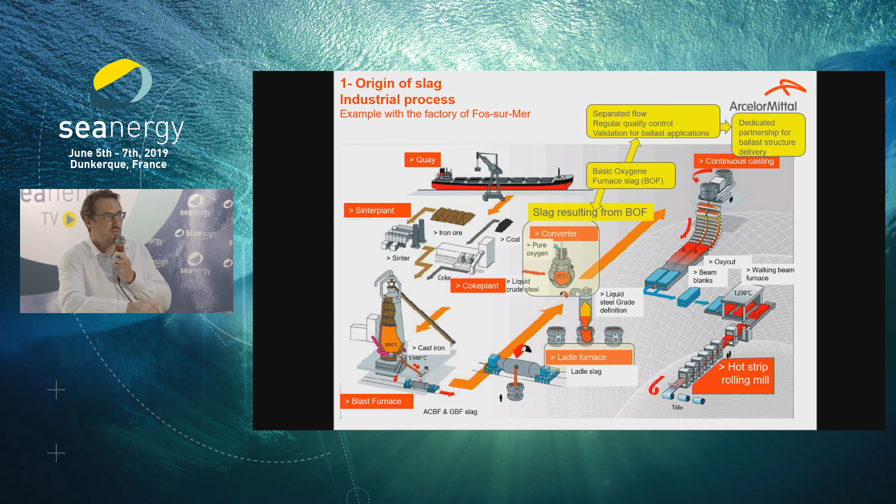In a steel plant, in the process of steelmaking, we have different steps with different generation of byproducts. In these different steps, we generate an average of 50 different byproducts in the steel process. We select one of these byproducts generated by the converter, which converts the pig iron into steel. At the step of the converter, we inject oxygen into the liquid pig iron in order to extract the carbon and generate CO2.

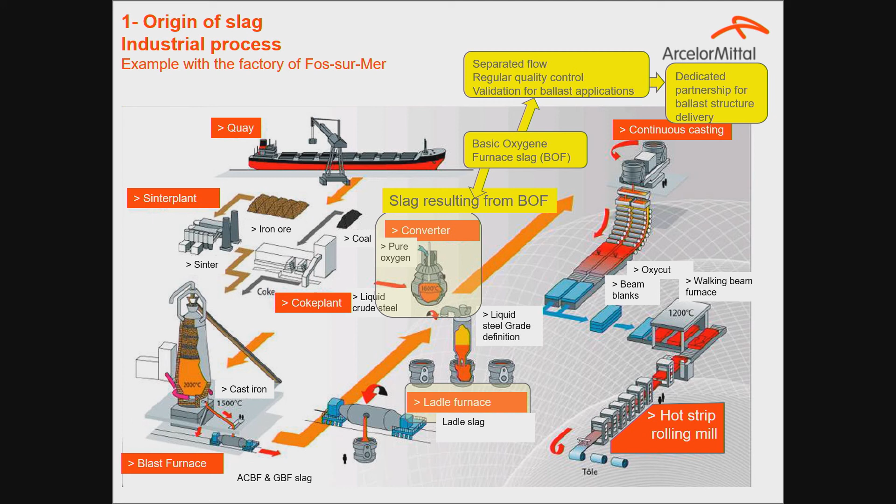During this step, we also inject a large quantity of lime into the liquid steel. Part of this lime is transferred directly into the slag, the converter slag, and part of the steel is also a component of this slag. This slag is extracted from the main flow, and quality is checked from this converter up to the final product definition, so we work as a quarry.

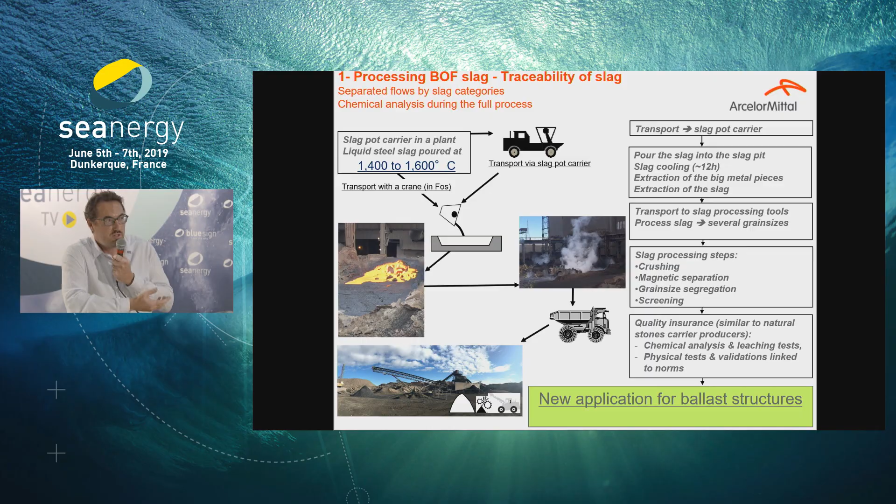So you have there the different steps of the process inside a steel plant. Typically, this is the case of the plant of Fos-sur-Mer, but you have the same process which you will find in the plant of Dunkirk. In these different steps, we slowly cool the slag and prepare the different grain sizes of the final material. What we can say is that this material has an interesting high density, but ArcelorMittal has never checked the possibility to propose this possible ballasting material to the offshore windmill park.

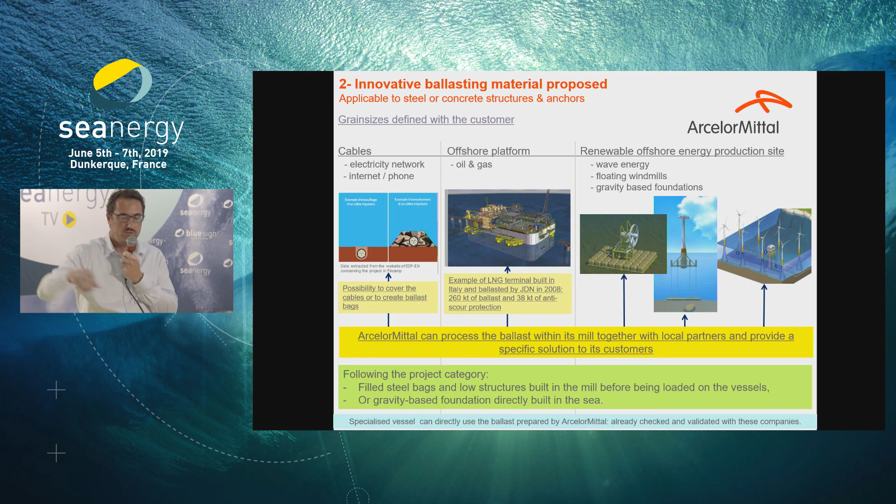So the idea is to propose this recycled material in different applications, such as stabilization of cables, offshore platform ballasting, and also floating structures and other structures built in the sea. Inside ArcelorMittal, we are also ready to prepare designs made of steel in order to generate different boxes and bags which can be put on cables or on different structures, depending on the need of the customer.

So what is interesting in this application? We generate value based on this byproduct generated in our steel plant. This is fully innovative, today it has never been done around the world. This is also a solution which will be tested in front of Marseille, directly in the sea, in order to estimate the impact on reefs and generation of life in the sea.

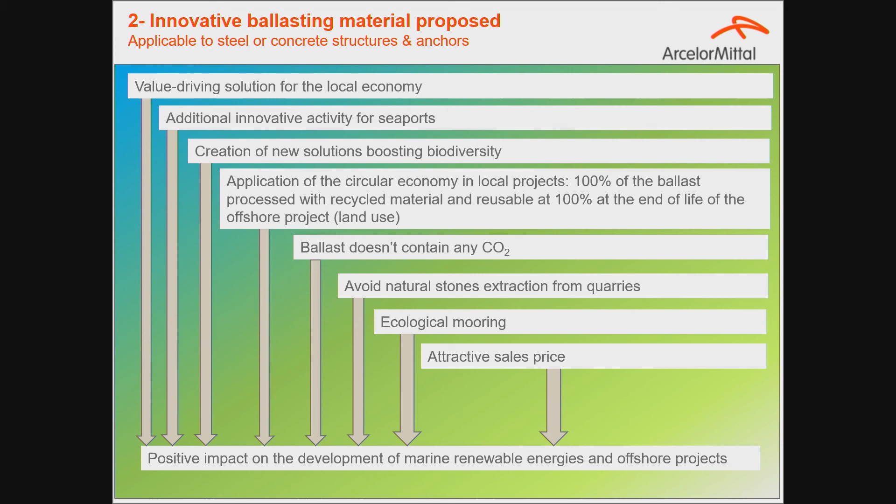So we think that this material will boost the ecosystem in the sea directly, due to the fact that today it is applied for plants on Earth. We grind this material and use it in agriculture today as a liming agent for the soil. The effect is very beneficial for the soil today, and we think the effect will be the same on plants in the sea.

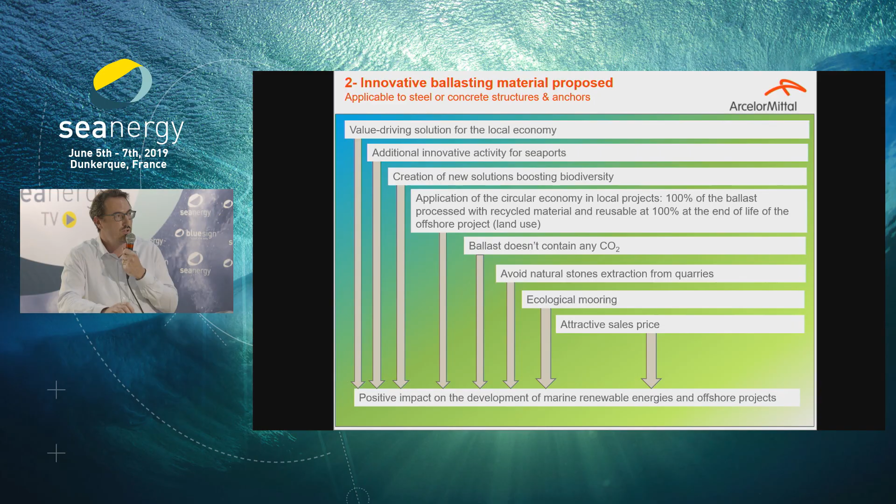The ballast doesn't contain any CO2 today because the CO2 is charged on the steel. We apply directly a clear circular economy project. It's a local project with local material for ballast. We avoid extraction of natural stone from quarries, and we propose different solutions such as new ecological mooring also for application in the sea. In parallel, we will apply a clear attractive price for this material.

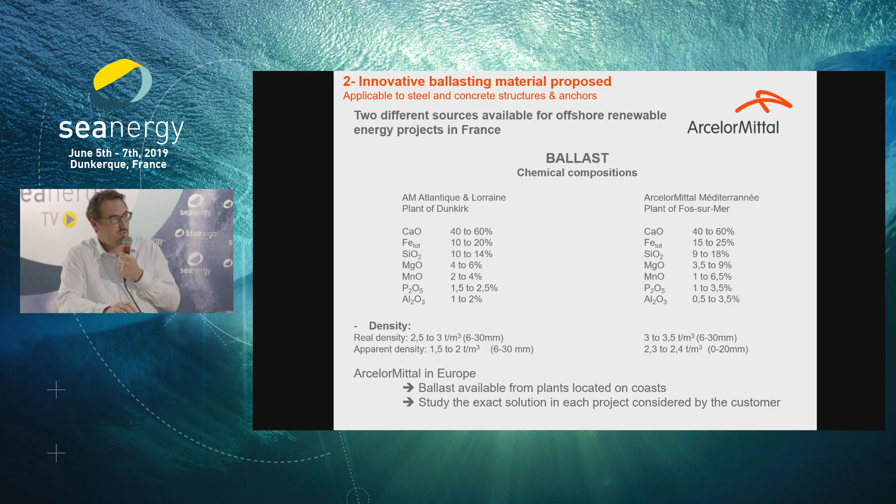So you have there an idea about the composition of the material. The content of iron inside the material will provide high, interesting density for this application. And you have there some typical values for the density. So we can estimate around 3.5 tons per cubic meter of real density.

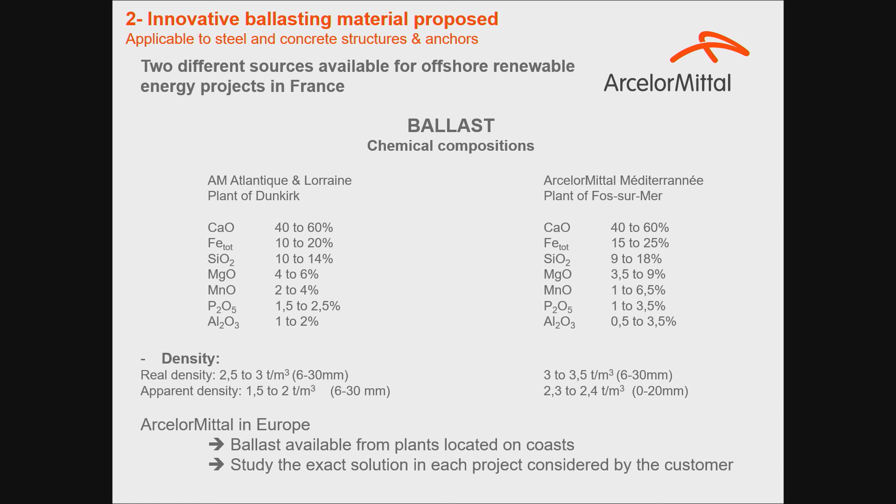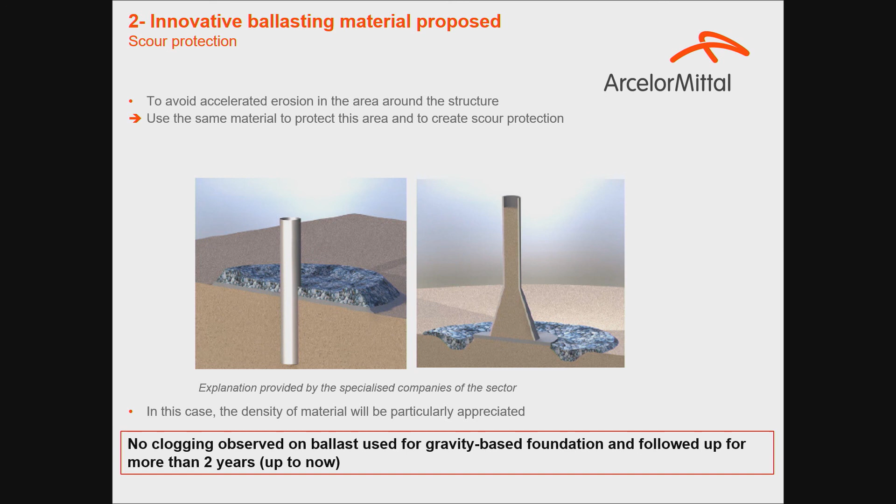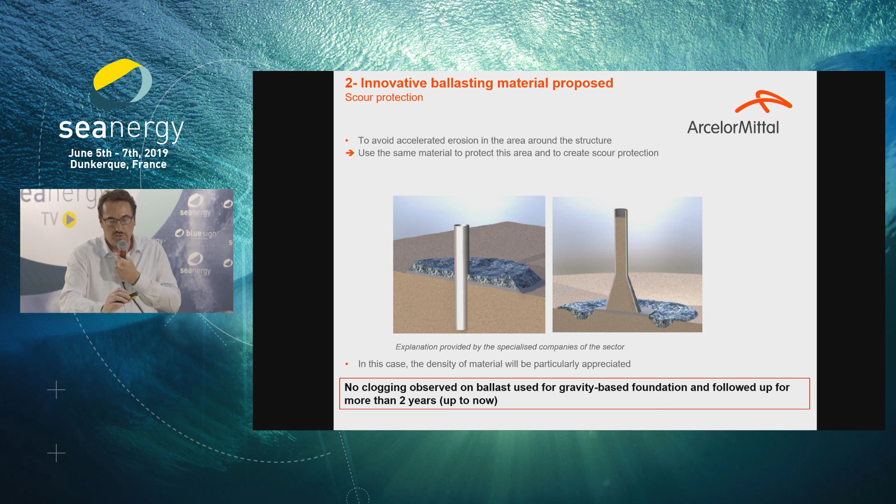We can also propose this ballasting as a scour protection around the different windmills. Due to the high density, it's more stable, and in this case we can boost the local environment, generating some life that will be favorable for the plants.

In parallel, this material is charged with lime. Part of the lime is free lime, so we get an effect of expansion, and we conducted technical tests in order to get clear validation of the use of this ballast in a closed structure.

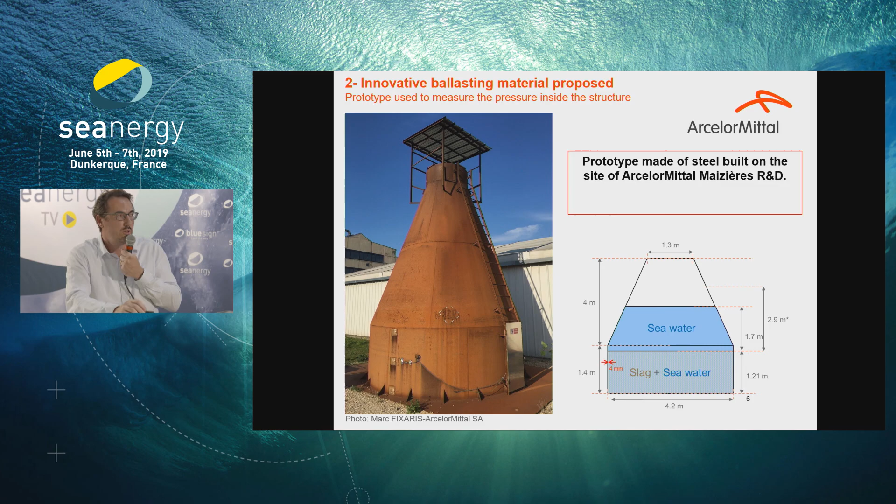In this case, we built at a 1:5 scale a structure prototype in our research center in Maizières, and we followed up inside this prototype, which has been ballasted and filled with seawater. We monitored the pressure exerted inside the structure in order to validate that the expansion would not cause disruption from too much pressure on the wall.

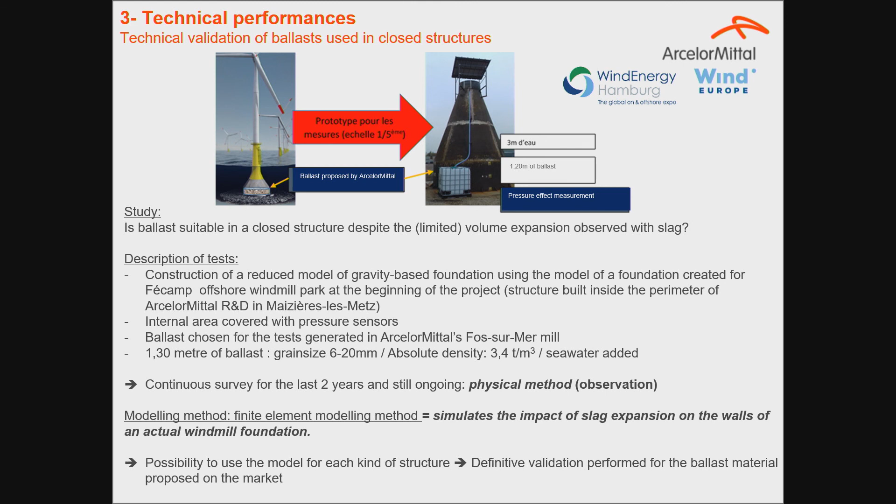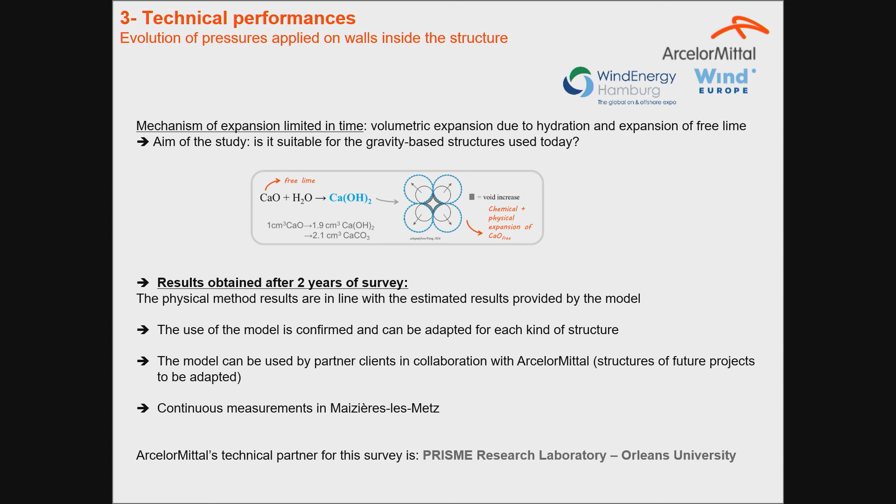So this has been validated. You have there the effect of the free lime in contact with water. The expansion is clearly limited, as we have measured since 2 years ago, with regular measurement of the pressure on the walls.

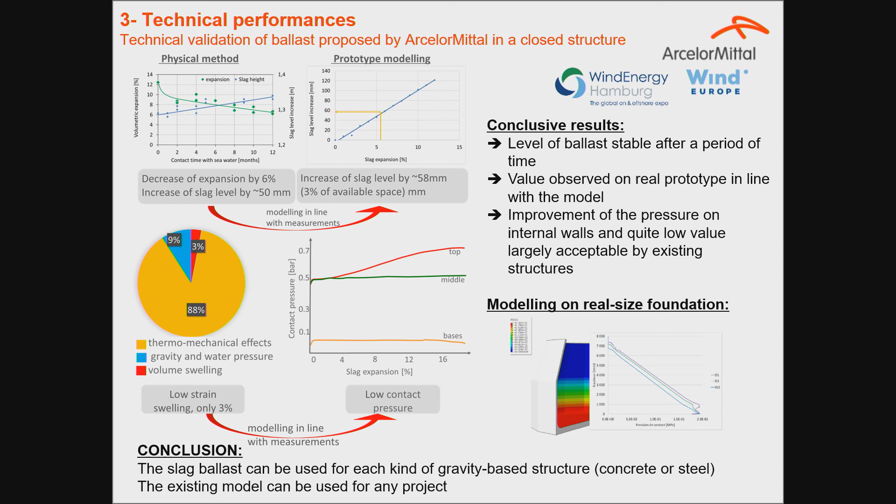You have there the different results of the study. And the conclusion is that we validate this new ballasting material for projects such as the project of Fécamp, made by EDF, with this kind of structure.

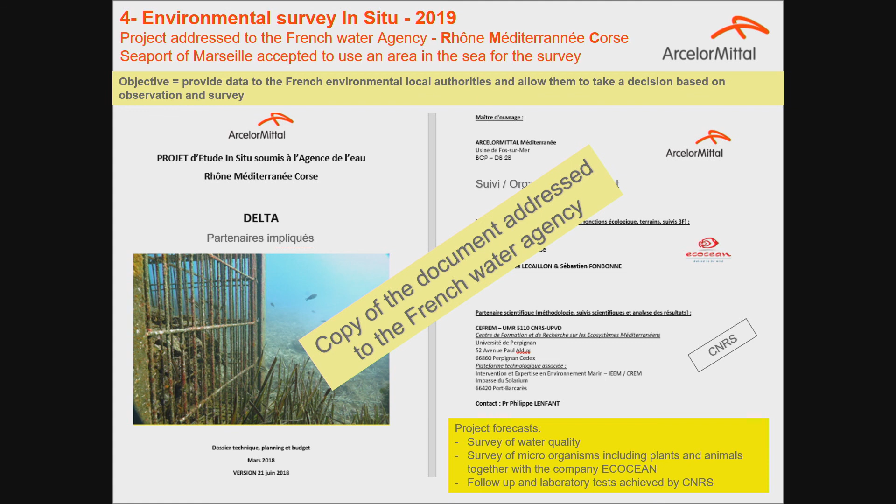In parallel, we will test the use of steel slag as an environmental boosting material in addition to ballast. We are working together with the company Ecocéan in order to follow up the environmental effect of this material.

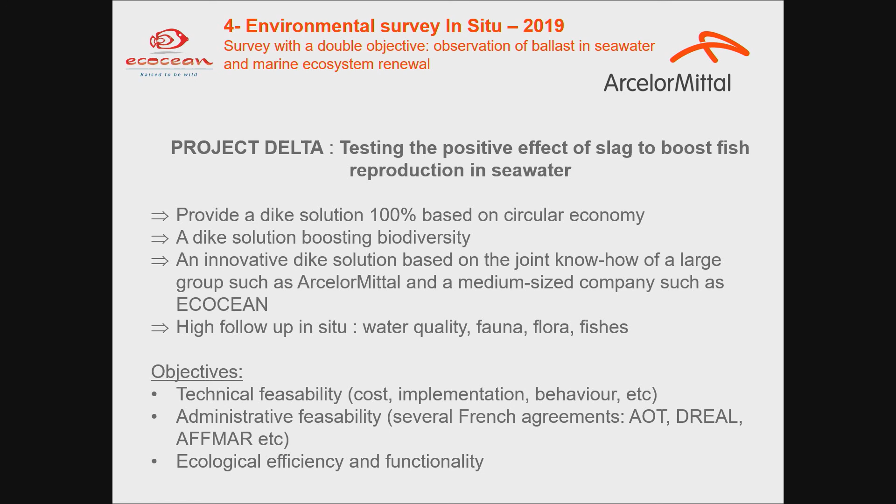The idea with Ecocéan is to propose a new type of dikes. One side of the dike will protect the coast, and the other side will be used to develop an ecological area. We will measure the efficiency of this ecological area in a project called Delta, which will start in front of Marseille.

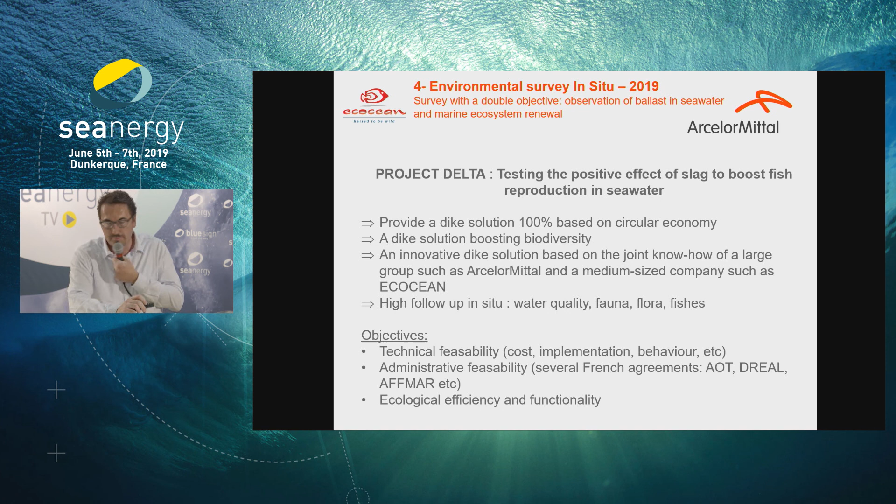For this Delta project, we designed specific steel boxes filled with this ballast, and we will follow up on water quality, fauna and flora, and fish counting during the full project. This project will take 2 years and will start this year.

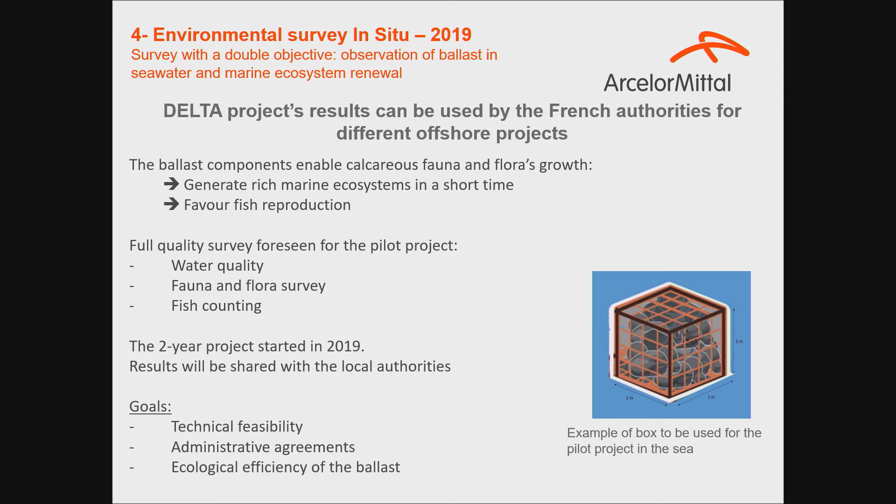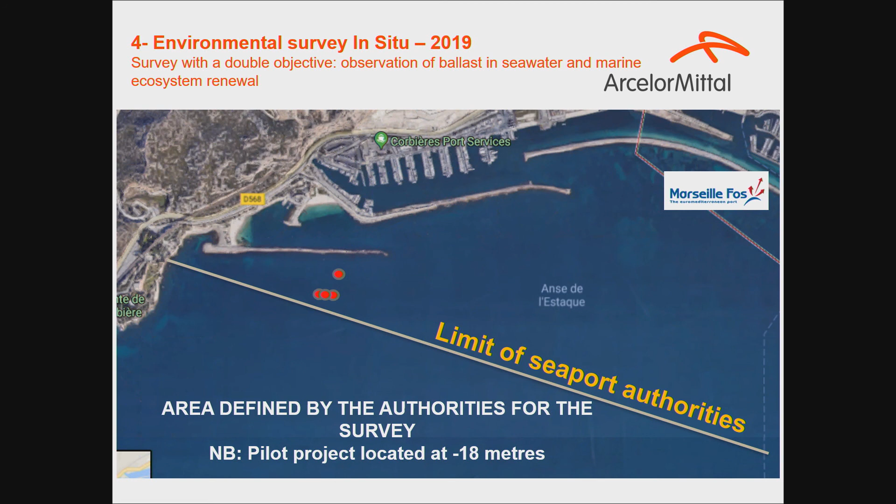You have there an idea of the area where the different structures will be placed in Marseille.

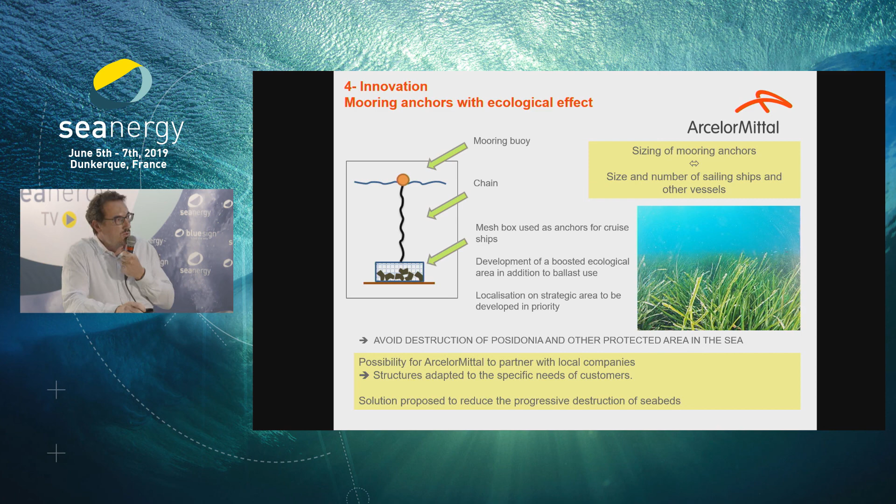As explained, we also now propose on the market mooring anchors for private vessels and sailing ships. The idea is to avoid the destruction of Posidonia on the Mediterranean coast.

From the two different plants of ArcelorMittal in Dunkerque and Fos-sur-Mer, we are able to deliver directly to the different offshore projects.

It's also possible in some cases to use the existing quay in the plants or in the seaport area, generating new activity in the seaport.

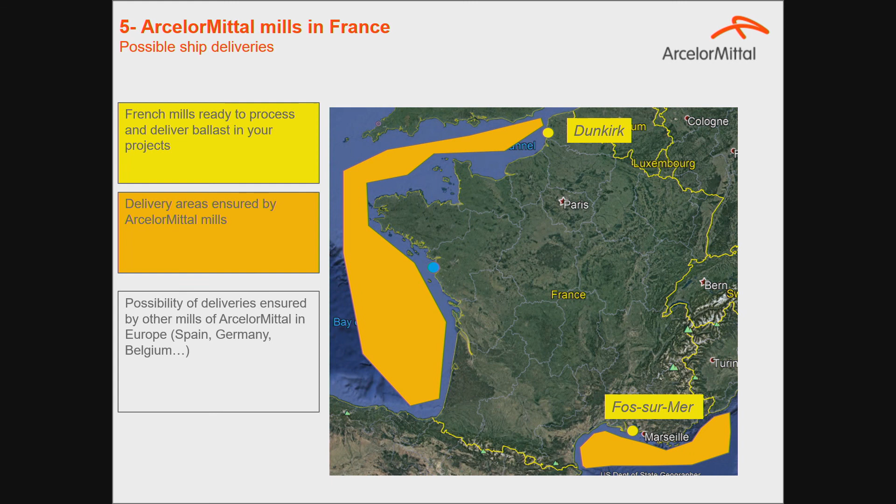If the project is too large, we are also able to use and propose the same material generated from different plants based on the Belgium coast, Spain, or Germany, depending on the size.

We are now starting a project in the south of France for the ecological evaluation survey, and we are interested in starting the same kind of project in the Dunkirk area, because today there is no regulation for this kind of use. It's fully new, and if we want to address the topic with the authorities, we need to provide them results, so local authorities can decide whether to accept this kind of new solution.

The technical part of the solution has been fully validated through the research tests we conducted over 2 years. Now we are starting the environmental effect evaluation, looking for positive environmental outcomes.

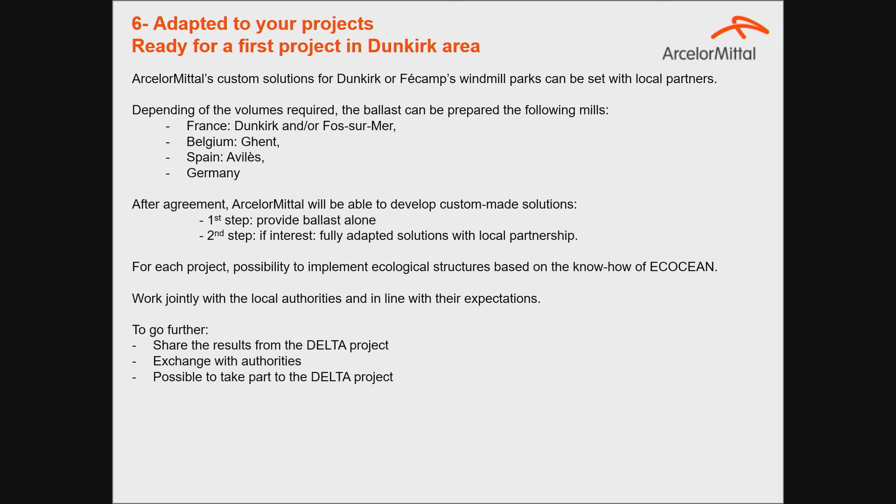The idea is to develop a specific boosted area where the plants will grow faster compared to natural stones or natural aggregates currently used. As a reminder, this material is ground today and used on land for agriculture everywhere in Europe, so we think the same effect will boost life in the sea for the plants.